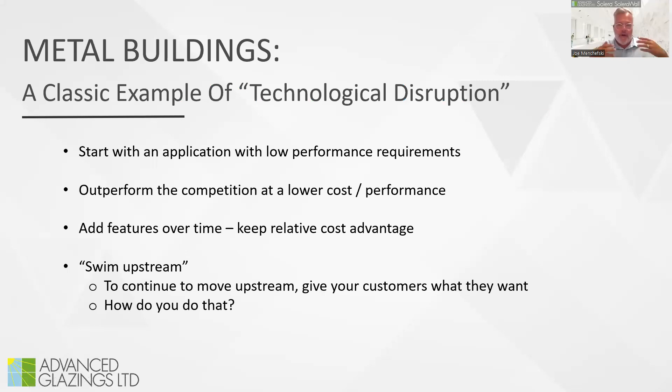The metal building industry is an absolutely perfect example of what they call technological disruption, and you hear that word a lot these days. But if you go back to the original book by Clayton Christensen called The Innovator's Dilemma, he talked about the idea of an industry or a company that starts with an application. They get launched with an application that has really low performance requirements and correspondingly low cost as well. They outperform at those lower performance requirements. Over time, they start adding features, they start getting more sophisticated, and as they say, you start to swim upstream.

In this industry, you look at some of the things coming out of the MBMA these days, it's just getting so much more sophisticated, so much more complex, and the applications are moving up to the higher end.

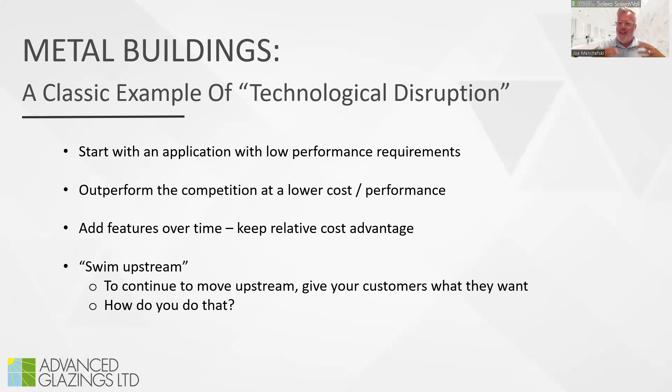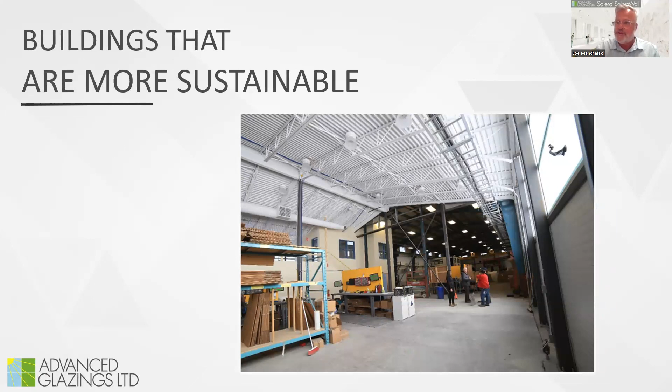So in order for an industry to continue to swim upstream, you've got to give customers what they want. How do we do that? Well, there's several ways. One is to make buildings more beautiful, more attractive. Another is to make buildings more functional, that work a little better. A third is to get into the green movement, buildings that are more sustainable. And a fourth is to build buildings better designed for the humans inside, more friendly for the building occupants. The good news is there's a way to do all four simultaneously, and it's all about the building envelope, managing the connection between the people inside and the outside world.

Let me explain. If you look at this graph, we've got connection level on the x-axis and quality on the y-axis. As you go to the right, you have higher levels of connection between the people inside and outside. At the far left, you've got the dark boxes, buildings with no punch-outs, no windows, no real connection between inside and outside—typically a lower quality, lower price building. Then you go all the way to the extreme—we don't see that much in this industry, but in more architectural applications, basically the all-transparent glass building. The connection level is very, very high—equally problematic.

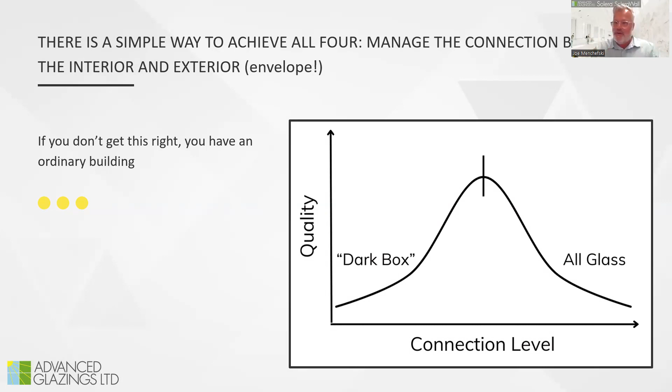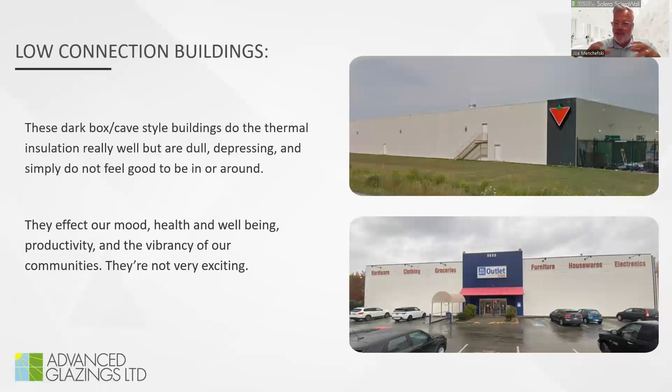Let's talk through that. First, the low connection buildings. These buildings are very practical and very good with thermal insulation, but they're not particularly exciting. They are not a move upstream. The isolation of humans from the natural world can actually reduce our level of health and reduce our level of energy, and all of this has been proven. I can share the links—I can show you how significant the impact is on people in these buildings. So if you need people to be productive and creative, and you need customers to linger for a long time in your building, these are not ideal.

Just some more examples—these aren't metal buildings, but when you get into where we are with building codes today, driving us down to this sort of 30% window-to-wall ratio, these are the kinds of things you end up with. Imagine living in a community entirely built of buildings like this.

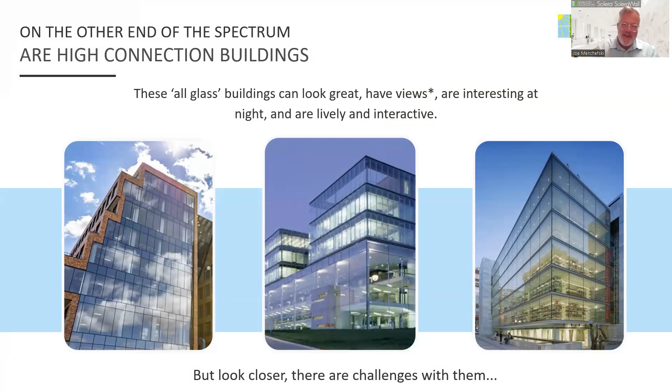Now let's go to the other extreme. These are what they call fishbowl buildings—completely transparent glass buildings, which can be gorgeous and really exciting. But they've got their issues too at this other end of the spectrum—too much connection. Let's look at all the things that come with too much connection.

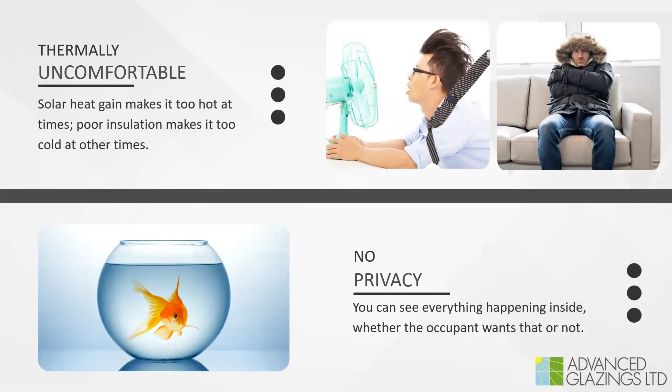One is thermal discomfort. When the sun is shining, we've all sat in the airport and had half our faces burning from the radiative heat of the sun. And in the wintertime when it's cold, they don't have much insulation, so it's very uncomfortable when you're at the perimeter of the building. Of course, there's no privacy with that much glass. You're not even going to meet building codes with that much glass these days. Glare is a huge issue, and I'll talk about glare a bit more—glare is absolute brightness, but it's also about bright and dark together simultaneously.

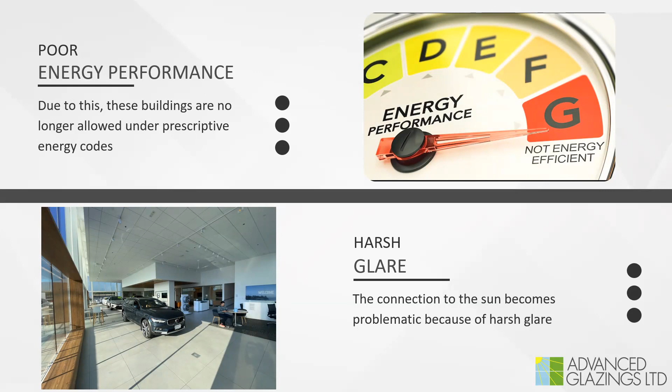The hot spots, as we call them, can be very problematic as well. And that glare will lead to those glass buildings being completely covered in blinds, and blinds are not without issue. People say, well, just put the blinds up. But when you put the blinds up, you've got the cost of installing them, the ongoing cost of maintaining them, and you no longer have any natural light in the building because the blinds are pulled—you just have to turn on the artificial light. And you also don't have views anymore, which can be very important to the health and productivity of the people inside.

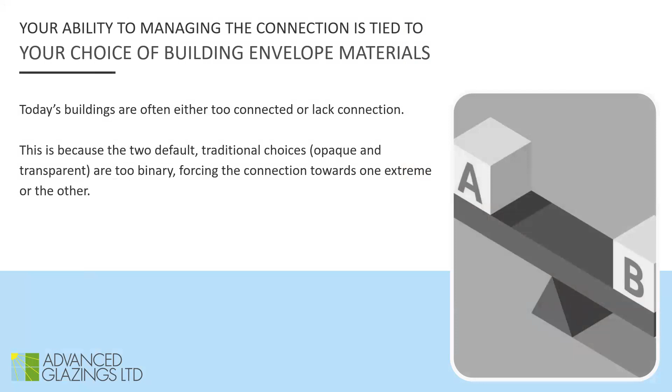So why do we end up with so many buildings at these two extremes? It's because the materials we've had for so long for constructing these buildings are binary—in other words, you've got materials that are either opaque or transparent, so they let no light in, or they let in extreme levels of light.

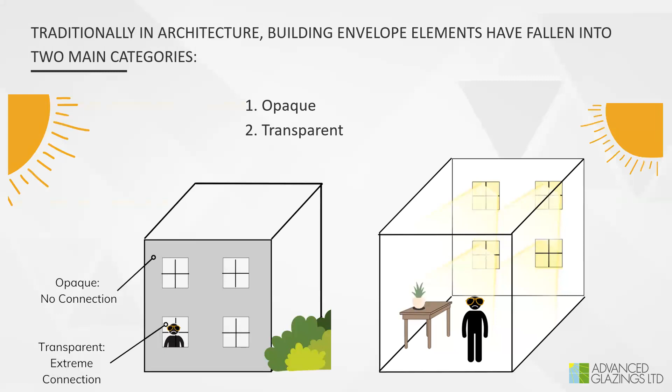When you look at all of the things that you want to have in a good building envelope, and I'm assuming a higher end building where you have people occupying the building on a regular basis, and that you want them to be productive, you want them to be healthy, and you want them to linger.

Now, given those things, let's look at a few of these parameters that really matter to a good building envelope. Are we providing views? Opaque's not going to do that. Transparent is. Thermal insulation, opaque is going to be there for you. Privacy as well. Not very interesting—they tend to be a duller building, not a higher value building.

Thermal insulation is not there with transparent glass. Neither is privacy. It is interesting though. Neither of the two components that we have now provide great natural light. Obviously, the opaque's not going to provide any light, but transparent is going to provide light that comes with glare, so it's not really giving you the great natural light that a lot of us know is important these days.

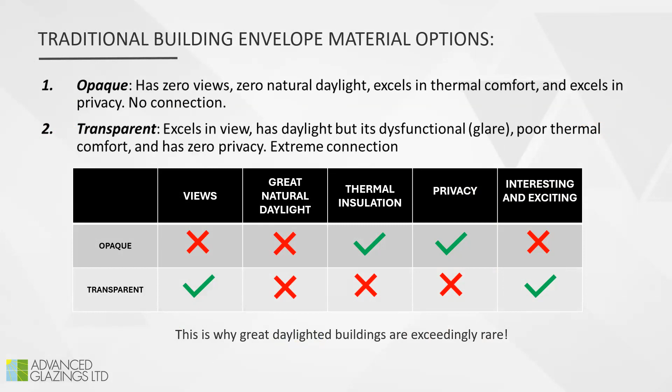But what if we had a third option? This is where we're talking about some changes to the building envelope. And some of this is happening now, but this is a way of doing it more often with glass.

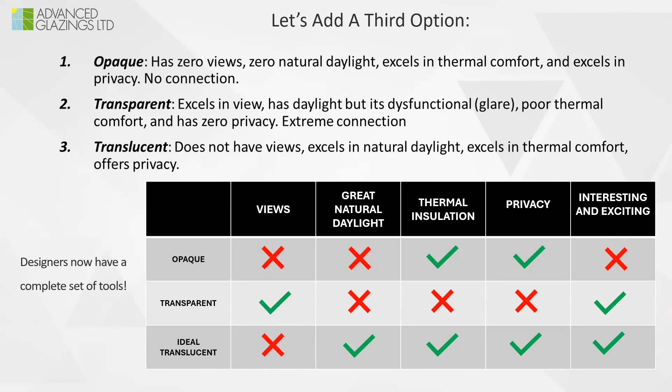So when you look at the boxes that we're trying to check for opaque and transparent, we never got there with great natural light. But if you add a translucent glazing material—something that excels in natural light, excels in thermal insulation, really has high levels of insulation—you're going to let light into the space. It's going to be light that's glare free, and it's going to help you meet building codes as well because of the high levels of thermal insulation.

If you look at the transparent glass and the ideal translucent glass together, you can check all of the boxes. You've got views, you've got great natural light, you're going to have the thermal insulation, the privacy, and of course it's going to be a much more interesting, higher quality building.

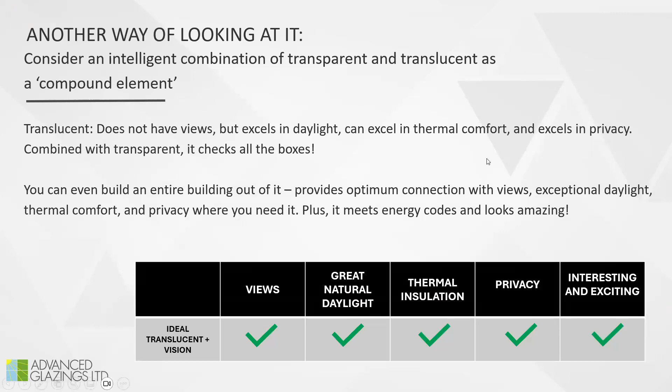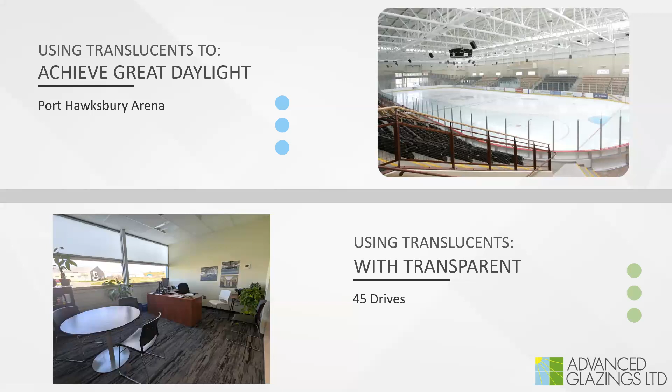Down the bottom, we see transparent and translucent working together. The translucent is bringing the natural light into the space. The transparent is providing the views, and they work together to do that. At night, the light entering the building is being diffused softly, but the light exiting the building is as well, so you can have this sort of lantern effect that makes your building become a centerpiece.

Now, you can also use the translucent to frame your views. This is very high end when you get into some automobile dealerships and create very beautiful soft light inside.

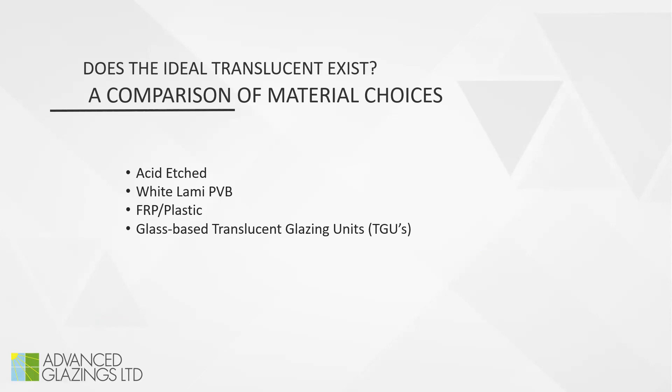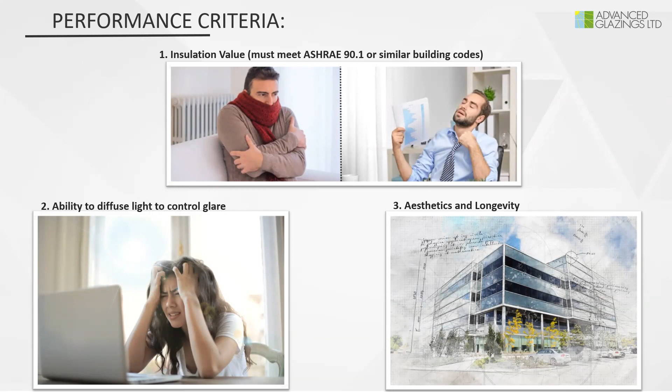We're going to look at FRP and plastics, which are popular in this industry, and we're going to look at a glass-based translucent glazing unit, which takes it up just a notch. Why do I say takes it up a notch? We're going to look at all 4 of these products in terms of 3 criteria: first, insulation value; second, the ability to diffuse light and control glare;

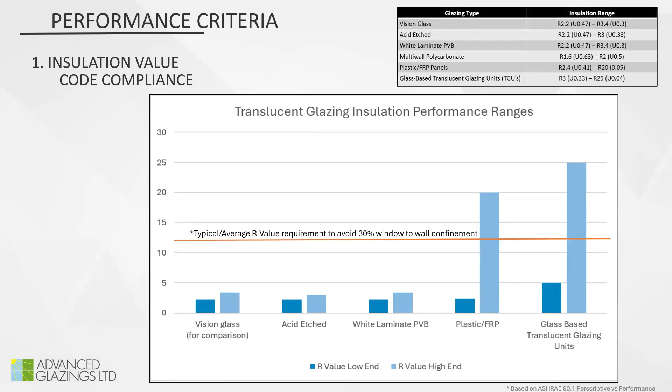and third, aesthetics and longevity. All right, very quickly on insulation: vision glass, acid etched, white laminate—none of them are going to have a high enough insulation value that they start to allow you to eliminate a portion of the opaque component of the building envelope. Only plastic and glass-based translucent engineered light diffuser are going to get you there.

Now, let's talk about diffusion.

It's got to diffuse. Any glazing that you're going to use for the purpose of bringing natural light into a space has got to have a high amount of diffusion.

I see a chat there, I'm going to take a quick look. Love when anyone says insulation. Well, kind of have to these days. It is a critical component of any new building these days.

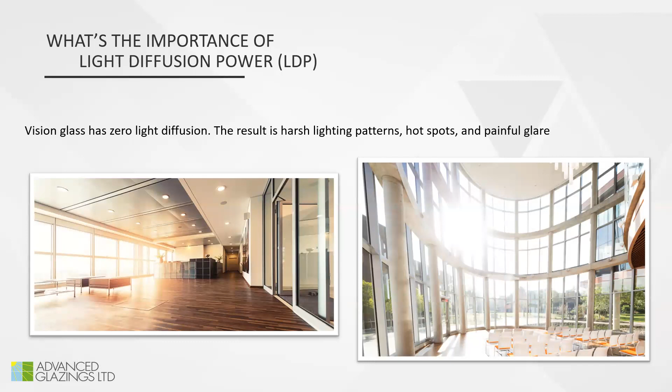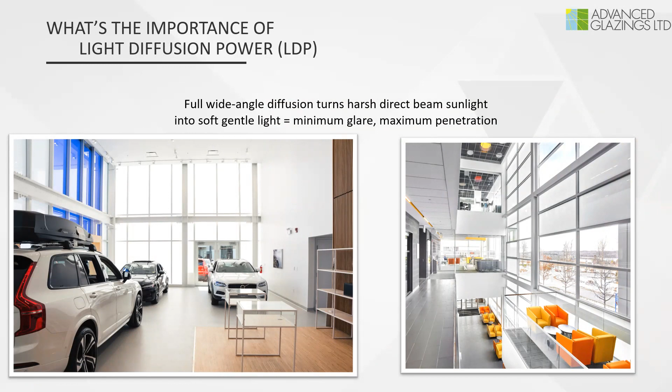So light diffusion power, let me introduce that for you. First of all, vision glass, in order to see through it, can't diffuse the light at all, which is why you have the ability to have a view, but it's also why it's not very good for bringing light into a space for the purpose of the sun being your illumination source. If it diffuses poorly, it can actually be more problematic than transparent glass. In order to diffuse properly, you need a high light diffusion power. In other words, you need to spread the light evenly in every direction. Let me explain light diffusion power quickly - it's not as complicated as it initially seems.

So here's the experimental setup. You take your glazing material, whatever it is, and put an opaque backing on it, cut a little hole in it, and shine a light down at 45 degrees. Measure around the 180-degree arc around the back and find out where the light goes. That's all you're doing - where does the light go when it passes through the glazing.

Transparent glass is going to do exactly what it's supposed to do. The light shining down at 45 degrees is all going to land at minus 45. You're going to get that hot spot - very difficult to work in this office. By the way, the image at the top is what's called a photorealistic rendering, from a lighting modeling tool. The bottom is what's called a false color rendering, which uses color to show you how bright it is in that spot. So you get that super bright spot, those sharp lines - we've all seen the hot spots.

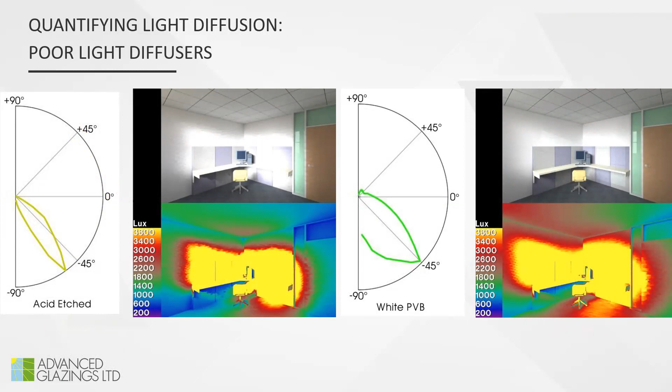Acid etched white laminate glass - you can see, especially from the false color renderings, you are getting some level of diffusion. The lines aren't as sharp, but you're still getting the hot spot, still going to get that bright spot. You're going to get some visual privacy, but not good, even distribution of light.

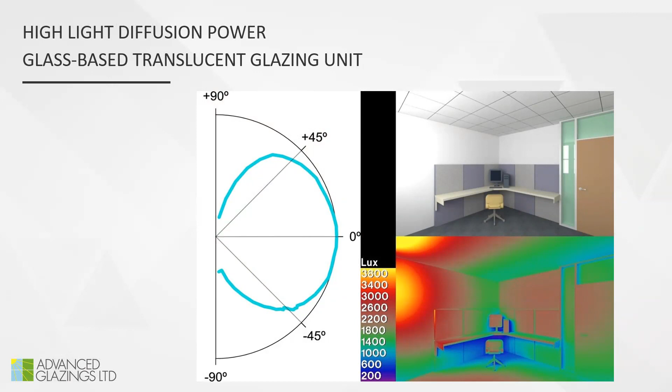This is what a good light diffuser looks like. When the light hits the glazing sample, it then moves in every direction simultaneously. There's two advantages to that. First, you don't get the bright spot - it's gone. Second, the light that's going above zero, going upwards, instead of hitting the dark floor, is going to hit the ceilings, hit the walls, and push deeper into the building, which means you can illuminate much more of the building from the wall instead of having to put skylights on the roof. Unless you've got a huge floor plate, you can bring in a whole lot of light from the vertical instead of from the roof, which is hugely advantageous in this industry.

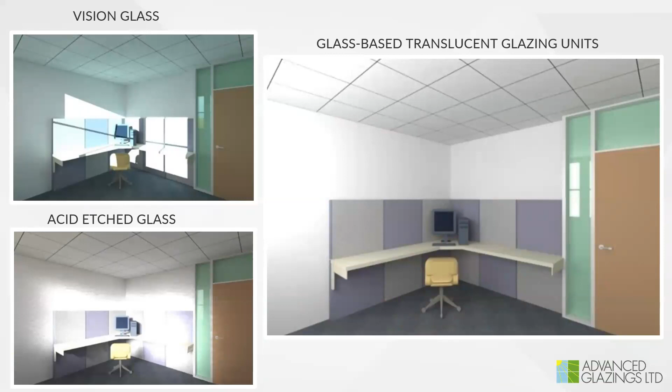So just a quick summary: with vision glass, you got that really bright spot with nice square edges. Acid etch, you still get the bright spot, just the edges are a little softer. But with a glass-based translucent glazing made for softer light, you're going to get a really nice even distribution, and it's going to penetrate deeper into the building. So the bottom line is you're going to have to use high light diffusing glazing, a glazing with a high light diffusion power, in order to achieve having the sun become the illumination source, the free light from the sun, in the building.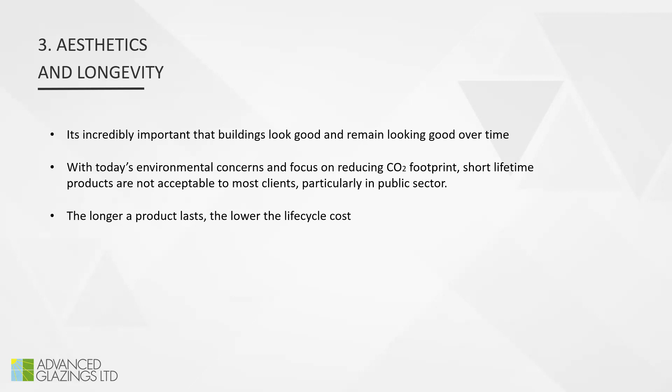Almost everything looks good from the beginning, but over time it doesn't look so good. The longer the product lasts on the building, the less replacement it needs, and the lower the overall cost is going to be to the building owner.

Acid etched looks good and is going to last a long time. White laminate, depends on who you talk to. I think it looks good and has the longevity, but you don't have the insulation and you don't have the light diffusion. A good glass-based translucent glazing, it's going to look as good in 50 years as it does when you put it in.

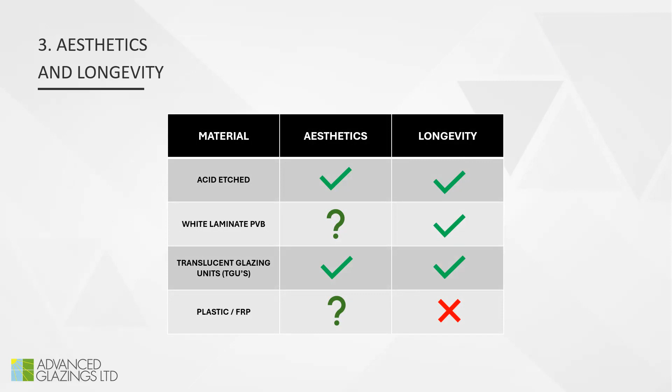Plastics look great at the beginning, but over time things shift. There's a lot of applications where that's okay, where you don't have people in the building, where the appearance of the building isn't that important. Fine, that's a good application for plastics. But if you're going to have people in the building and the appearance matters to your customers and your community, plastics are just not going to cut it.

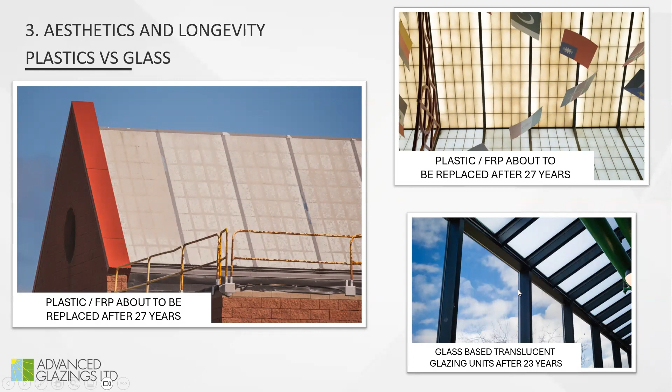We've all seen this, I don't have to go into too much explanation. We've all seen plastics that have degraded over time. This is the same university - one section uses an FRP, and another section uses a glass-based translucent. The 23-year-old glass-based translucent looks exactly the same as the day it was installed.

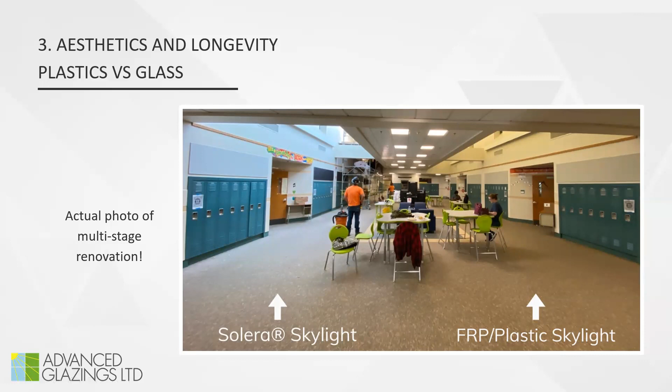How does that affect the inside of the building? You're looking at a multi-stage renovation here. On the right-hand side, they've still got the aged plastic. You can see the yellow hue that it's casting, whereas the glass-based light diffuser is going to give you a nice bright white light forever.

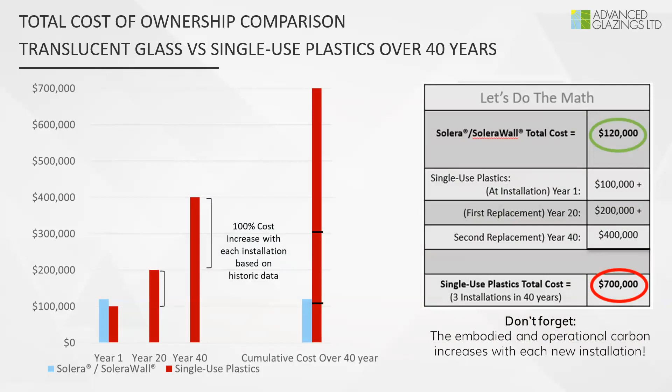Total cost of ownership - every time you have to do a replacement, your cost goes up. Based on the way prices have climbed over the last 50 years, if you project that forward, you're literally looking at sometimes 3-4 times the cost because of the regular replacement every 20 or so years.

I've had people on a regular basis come up to me and say, why don't we just use LED lights because they're so cheap these days? There's two issues. I live and breathe this stuff so it's easy for me, but not everybody sees the sort of information that I see all the time.

LED lights are not full spectrum. So you're missing some very important parts of the light that are critical to human health, things that affect our sleep, things that affect our energy levels, that are not there with LED lights. So eliminating natural light is not a good idea when you have a lot of building occupants and their productivity and creativity matter.

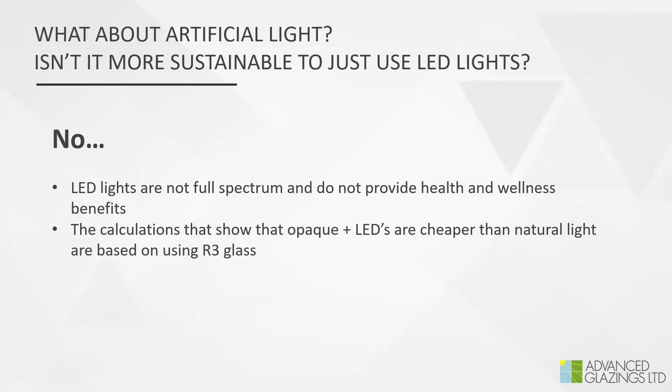The other thing is that the calculation for LED lights being cheaper assumes you just put up opaque walls, don't bring in natural light, and use LED. That calculation assumes you're using an R2, maybe an R3 glass. But if you get into an R12 glass, an R18 glass, which is what I'm talking about today, that math doesn't work anymore. It's actually cheaper to use the glass-based translucent.

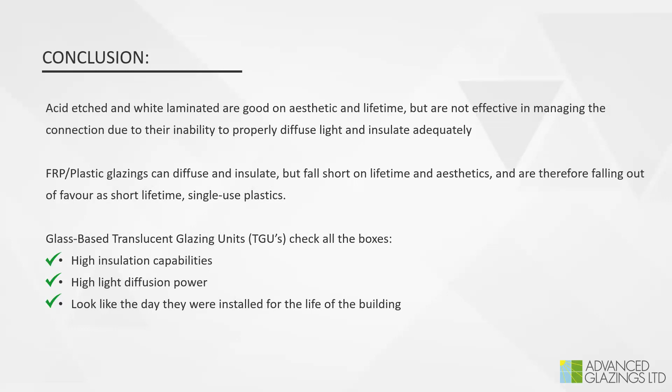So in conclusion: acid etched and white laminate last a long time and look good, but they don't have the energy performance, and they don't diffuse light well enough to be used for bringing light into a space. Plastics just don't have the lifetime, they don't have the longevity. Whereas a glass-based translucent achieves everything you need.

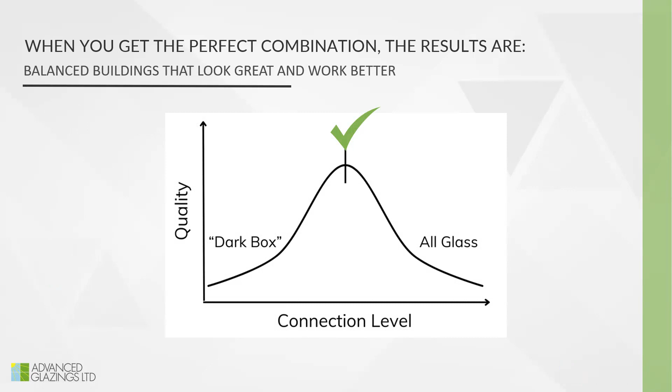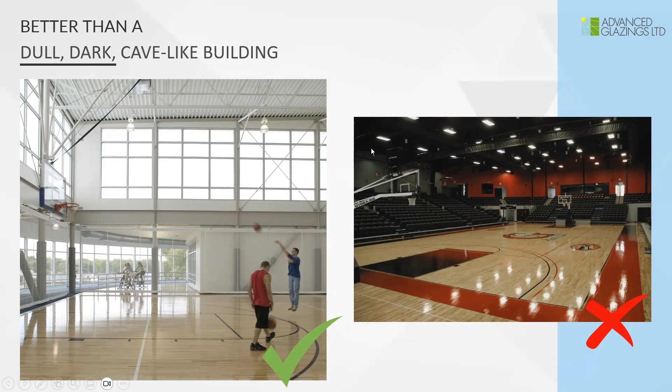You can have superheated solar collectors with too much glass. It does kind of matter in this industry because you've got a lot of reception areas and atriums that we're putting onto buildings now, especially in large sports facilities. You can create these really uncomfortable situations, but you can deal with that very easily just by swapping out some of the transparent glass for translucent.

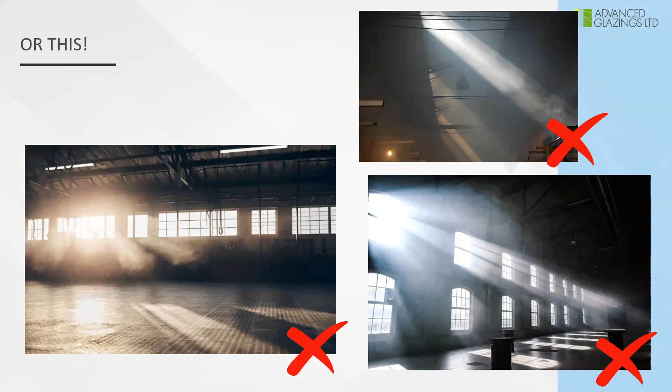We've all seen this, we've all seen the hot spots. Because transparent glass doesn't diffuse light, all the light falls in one place and the rest of the space remains dark. It's not the way to bring natural light into the space. The good news is you don't have to do a lot of the crazy stuff you've been told you have to do to bring in natural light - you literally just have to swap some of the transparent glass for translucent glass.

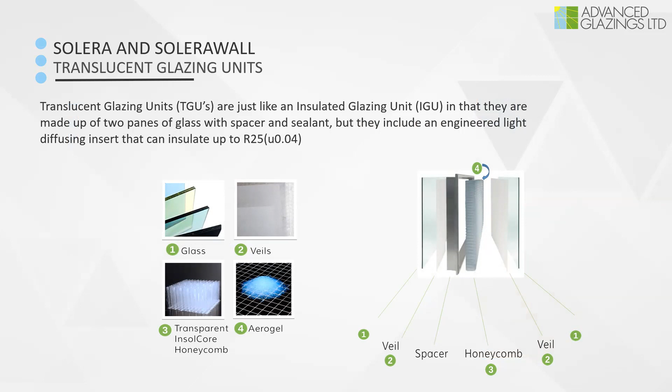Sometimes you need a thicker pane of glass, which is why that thicker spacer is there - I'll come back to that, I promise. But now you understand: the glass fiber veil gives the diffusion, and the honeycomb and aerogel give you that really high level of insulation.

Now, what about vision? People want to see out, right? Especially when you've got lots of people in there. We say that we are the guardians of vision.

Solera and transparent glass in combination keep the blinds off the window. Let me explain: with transparent glass, all the light passes straight through - it has to. It all falls in one place and the rest of the room stays dark. With translucent glass, the light strikes it and spreads evenly within the space, but you can't see through it.

But if you put the two of them together in the right ratios, the translucent brightens the room - it spreads evenly and brightens the entire room. So even though you've got a hot spot forming, the brightness of the hot spot is not as bright relative to the rest of the room, because the ambient light level in the room is very high, so the hot spot doesn't matter as much.

It's all about contrast. If you've got really bright and really dark together, it's very uncomfortable for people. But if the room is really bright, the hot spot doesn't seem as bright, and you can get a very comfortable space without feeling the need to put blinds on the transparent part, because everything is so nicely and evenly lit that you're not experiencing the glare. I hope that makes sense - stop me if it doesn't.

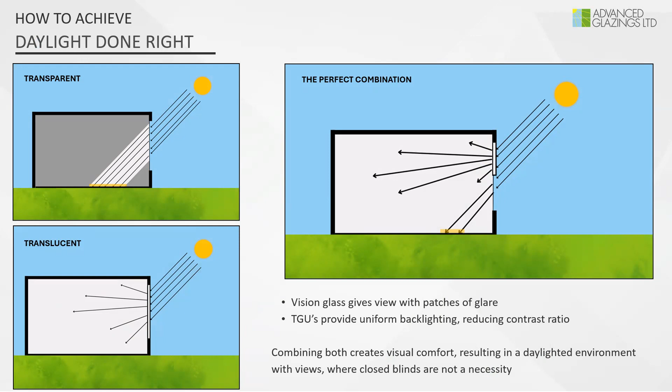No, it does. It does, Joe.

Thank you. Okay, perfect. So modeling - I'm not sure everybody here has been exposed to daylight modeling or light modeling. I'm going to show you a couple of examples, like the one that's up here already: original designs with transparent glass, a portion of the transparent glass being replaced by Solera, and then an actual photograph of the image.

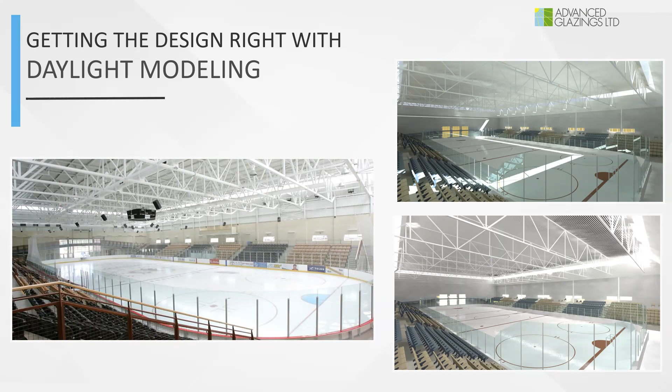We do a lot of work in schools and gymnasiums because it's been shown that kids do so much better when they've got natural light in the classroom. Pretty much every school being built in America and Canada now has light coming into the classrooms. This is a very classic situation: a school gymnasium where they put in a floor-to-ceiling curtain wall because they wanted the light and the view, but they were going to have such a serious glare problem that they would have ended up with floor-to-ceiling blinds.

So they modeled it with Solera in this top section, glare problem solved. Look how nice and bright the room is. The modeling is showing light bouncing off the ceiling. Here's an actual photograph, light bouncing off the ceiling. There's no artificial light in this picture.

This is a really old one, by the way. You can tell from the fluorescent lights, but I chose a really old one for good reason. First, it's a really good example, but secondly, to show you that this stuff has been around for a long time and you're not really going out on a limb at all. We're talking 25 years. This job is without compromise.

You've got the transparent glass down at the floor where the people actually are, so you've got the view that you need. You've got the translucent bringing in all the natural light to save you a lot of money, plus to make it better for the kids. And the translucent has a very high level of insulation, so you're still going to be able to meet all your building codes.

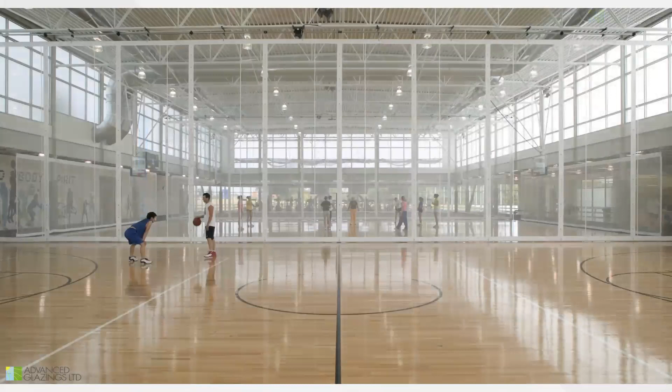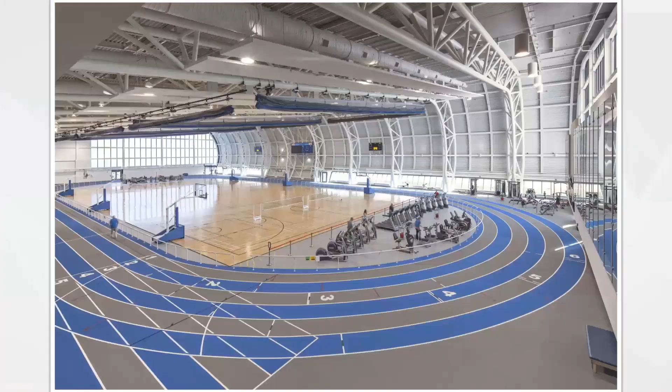Large spaces are the killer app -- I stole that from the tech world. In other words, what's the perfect application for a good translucent? It's big spaces. We do an extraordinary job daylighting, using the sun as the illumination source in really big spaces. We do a ton of that. And I know in the metal building world, there's a whole lot of these kinds of spaces.

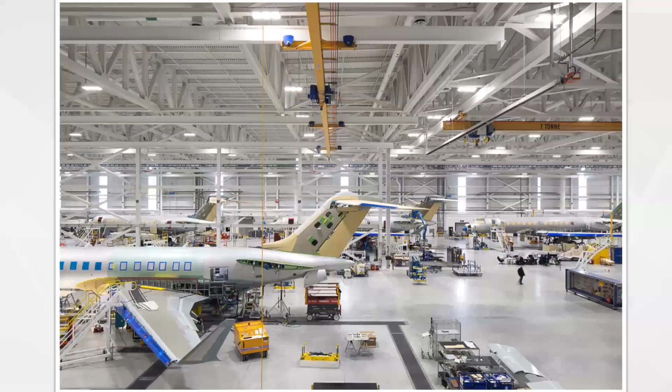Recently did a project with Bombardier building airplanes up in Toronto, Robert's old stomping ground, so had to show that one off. Really brightly lit space. They just moved their manufacturing operation to the airport, Robert. I'm not sure if you heard that, but very interesting move.

So again, all you have to do is swap out some of the transparent glass for translucent, and we can show you for free -- we'll do the modeling and show you what percentage of it you would need to swap out. Now, you can use a glazing contractor to do the install, but what most people are doing now is we're partnered with Wintech out of Missouri. I'm sure most of you guys are familiar with Wintech, and we can put our units in a Wintech frame and just ship completed windows to you for punch outs, ribbons, or clerestory, and it works with both corrugated or IMP.

This is just to show, if you needed to use a glazing contractor, say it was a storefront application or a curtain wall application, we've got a Solera that'll work with every one of those.

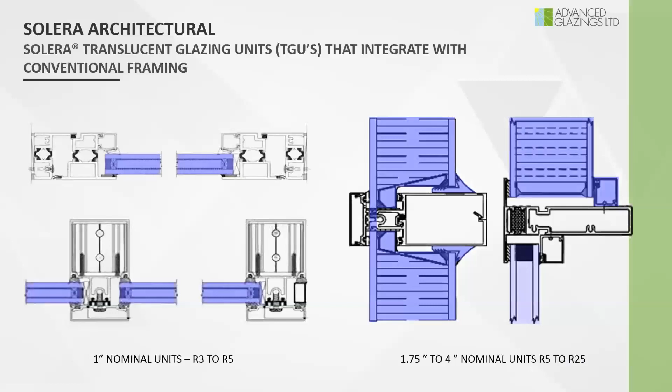What about that really visionary customer, the one that really wants to build a truly spectacular building? Something that's very extraordinary, but also higher performing? Let me introduce you to Solera Wall. Solera Wall does not need any framing system. Everybody's familiar with IMP -- they click together, they have parts that are male and female and they click together, and they build very, very quickly and achieve a lot of things. Solera Wall is the glass equivalent of IMP.

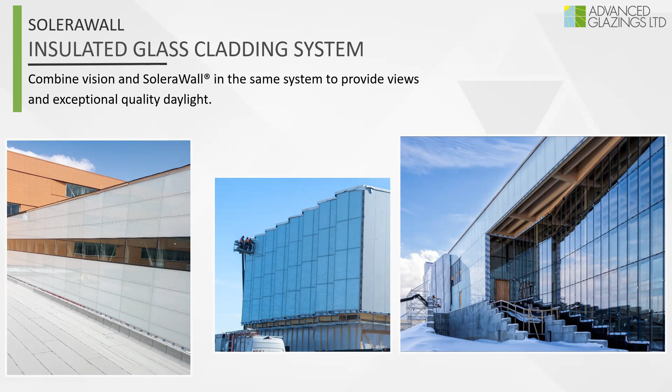So you can see there's no framing here at all when you look at the image on the left, because we've got a thicker spacer on the two panes of glass. We can make them male and female, again analogous to IMP, and have them click together. Let me quickly show you how it's done: the image on the left, the horizontal detail, you've got tongue and groove design, and they click together and stack. How do we stack them? Look at the image in the middle where it says the sill intersection.

That L-shaped bracket at the top carries the load of the glass and transmits it back to the primary structure, so there's no limit on how high you can stack them. That little T there, talk about an easy way to install: put up two panes of glass, reach in with an Allen key, turn those little T's, and they're now locked in place.

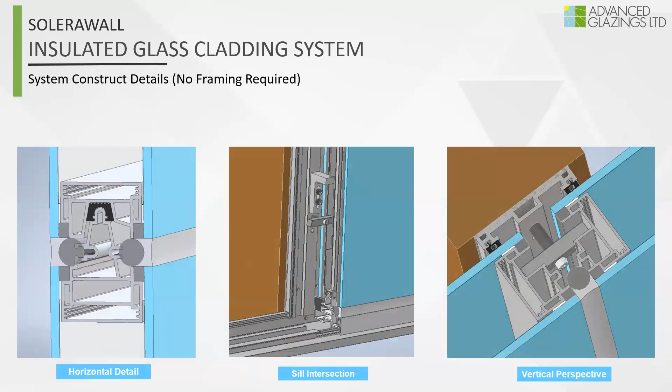And the image on the right, rain screen, right? We talk about air penetration, we talk about water penetration especially, but this is a true rain screen design, even though it's frameless.

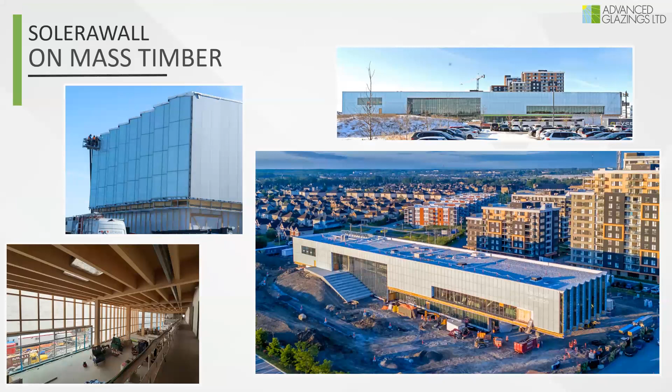It's been tested, and we know that you're not going to have any water penetration. This is an image of a project we did recently, a big project up in Canada, in Montreal - Solera Wall on mass timber, which is kind of hot these days. I know this is metal and I should be showing that, but it's such a beautiful application. The bread and butter for Solera Wall is on steel.

This is a high-tech application, lots of natural light. They've got their sales and technical team down one end of the building, and this is not your typical cubicle farm. Because of that natural light, it's a place that people want to be in.

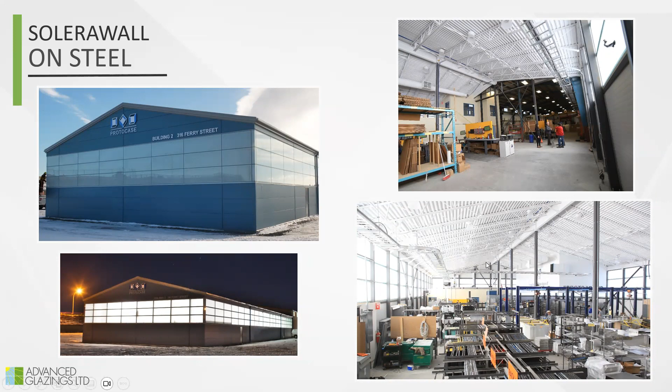Again, a Solera Wall on steel application, another tech firm - this is a big supplier to NASA and to Tesla. And there's that glow again, that nighttime glow. But look at the image in the bottom right-hand corner - there's not a single artificial light in that space. This photograph is full spectrum natural light from the sun, completely free and completely glare-free.

That's it, that's the main part of the presentation. I'm just going to slide through the gallery now. This is a perfect time for people to ask questions while I run through the gallery, so let's hear them.

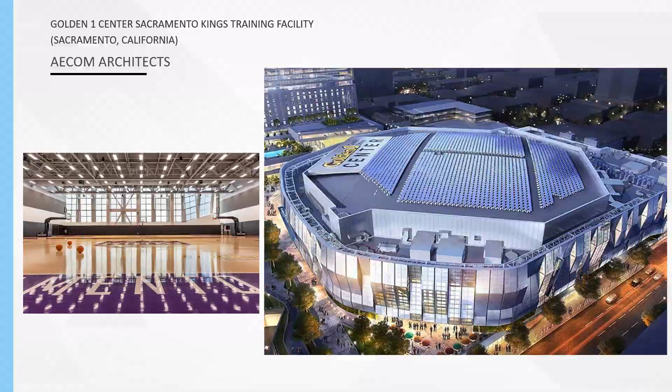Well, I'll break the ice, Joe. This is Robert again. Yes, sir. So one can imagine, with regard to the insulation, that the translucency does offer a significant reduction on the load to the HVAC system, because now there's not any of the direct... Is there a percentage that you're comfortable sharing that a translucent system versus a transparent system can offer? That is a great question, Robert - it's interesting, I never get asked that question.

The interesting thing is that we use a glass fiber veil to do the actual diffusion. That glass fiber veil also significantly reduces the amount of light and therefore the amount of heat that's coming into the space. Sometimes it's the daylight model that drives what visible light transmittance should be, but sometimes it's the solar heat gain. Sometimes it's the HVAC engineers that say, I want a maximum solar heat gain of 0.35, and that's what we'll put for the visible light transmittance. So we could go as high as an 80% reduction in solar heat gain. A visible light transmittance of 0.2 is not all that unusual, especially if you have a significant amount of glass.

So yeah, if the HVAC people are saying I only want this many BTUs to come into the building, we can control that. It's like a knob that we can turn to decide how much light, and therefore how much heat, we're going to bring in from solar heat gain.

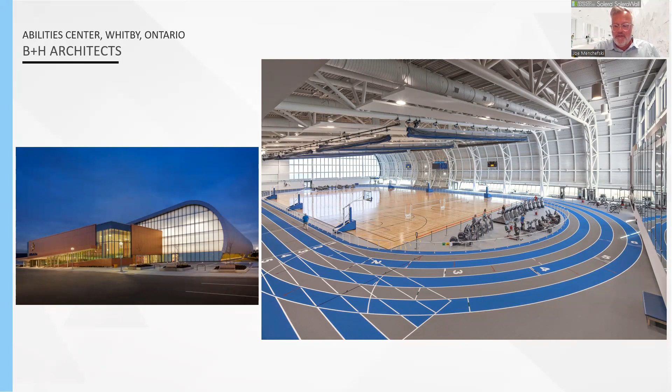Let me throw one more thing in there - it's not just the absolute solar heat gain, it's the placement. It's those hot spots that really give HVAC engineers nightmares - it's really hot over here, it's not hot over there, so now they have to redistribute the cool air and the warm air. So if you take away the hot spots, you're also improving the operation of the HVAC. Did I answer your question? You did, it's fabulous. Thank you.

This is maybe a good segue to your gallery. From the design standpoint for architects now, designing to the negative comes into play, because if we jump back a number of years to illuminate a building when Mother Nature turns the lights off, we used pot lights outside, giving you a spotlight effect illuminating part of the building.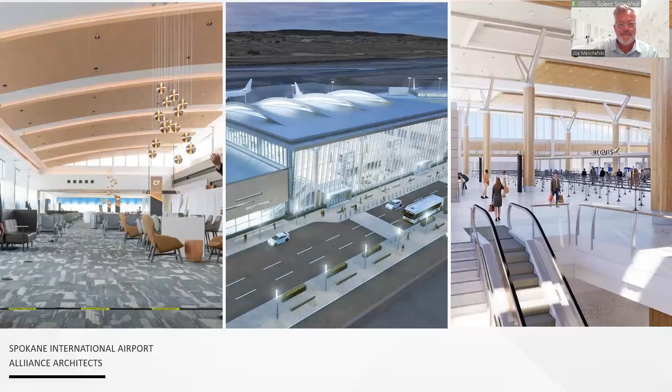We do a lot of airports, a lot of big jobs like that. Again, large spaces - think gymnasiums, think about large community centers. Those are the places where it's really going to stand out.

And there's a chat there - let me see. I could not load a file, but I put the link, though that doesn't work. If anybody wants to look up the Royal Bank of Canada, just search Royal Bank of Canada Gold Building and you'll see what we're talking about. The link worked, Robert, thank you. It's perfect, working for me. Yeah, perfect, okay.

So the other question I had - you were referring to something similar to the IMP. One of the conversations going on now about IMPs and other insulation products is this, to meet energy codes, of continuous insulation. So does this wall then classify as a continuous insulation system for a wall?